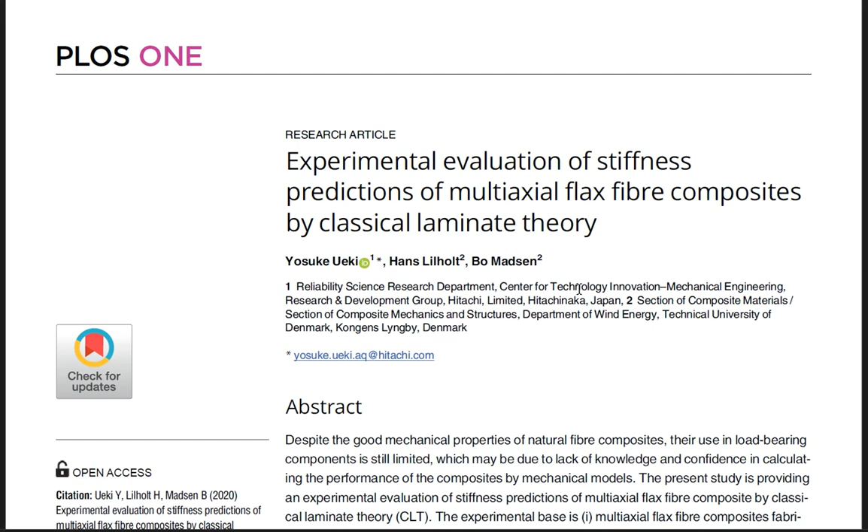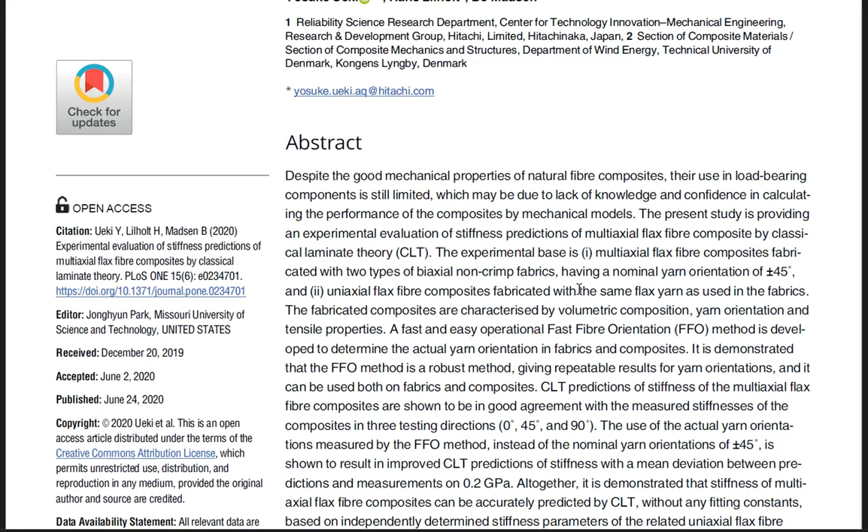In our course, we have established CLT as the fundamental methodology for predicting the macroscopic elastic behavior of a composite laminate, based on the properties and orientations of its individual plies. This paper serves as a direct and practical validation of this very theory. It moves the concept from the textbook to the laboratory, testing CLT's accuracy on a specific emerging class of materials: multiaxial natural fiber composites.

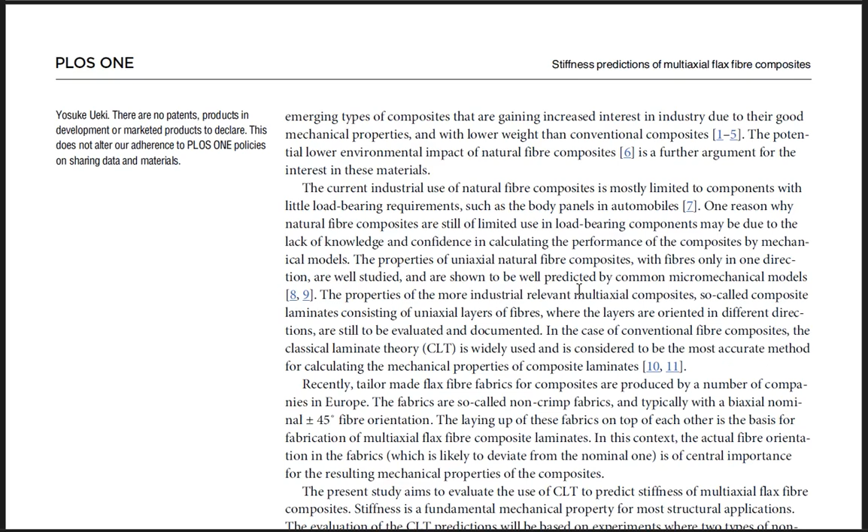The researchers fabricated multiaxial composites using two types of biaxial flax fabrics with a nominal orientation of plus minus 45 degrees, arranged in two different layups, A and B.

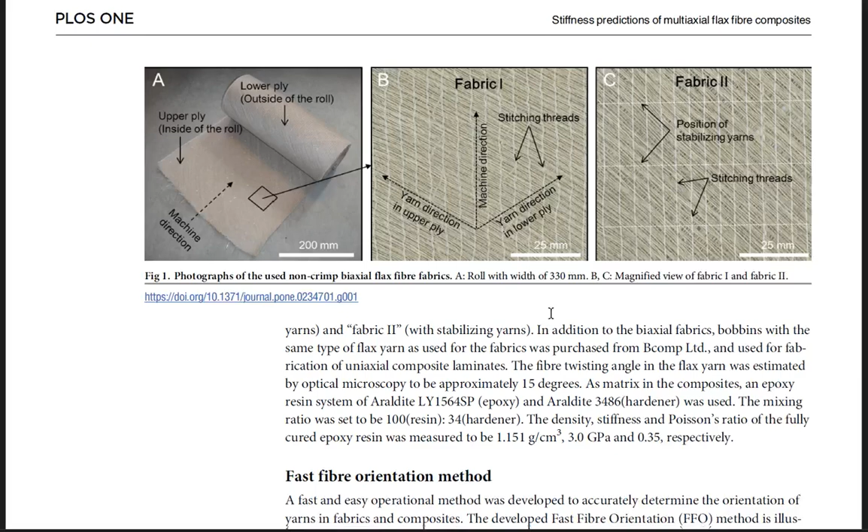Crucially, they identified that the actual fiber orientation in the fabric can deviate from its nominal value. To address this, they developed a novel method called fast fiber orientation, or FFO method. It used 2D fast Fourier transformation on scanned images to measure the actual yarn angles with high precision.

In this paper, the data shows the actual orientation was not perfectly plus minus 45 degrees, and the fabric was notably unbalanced.

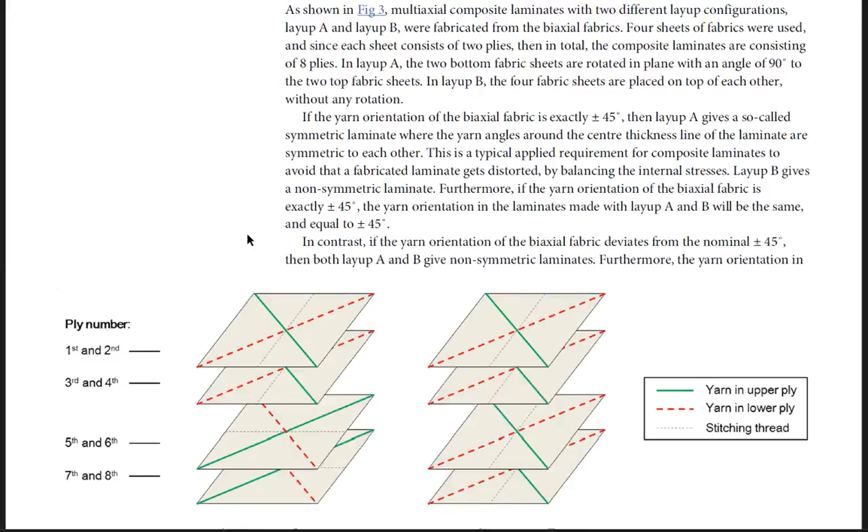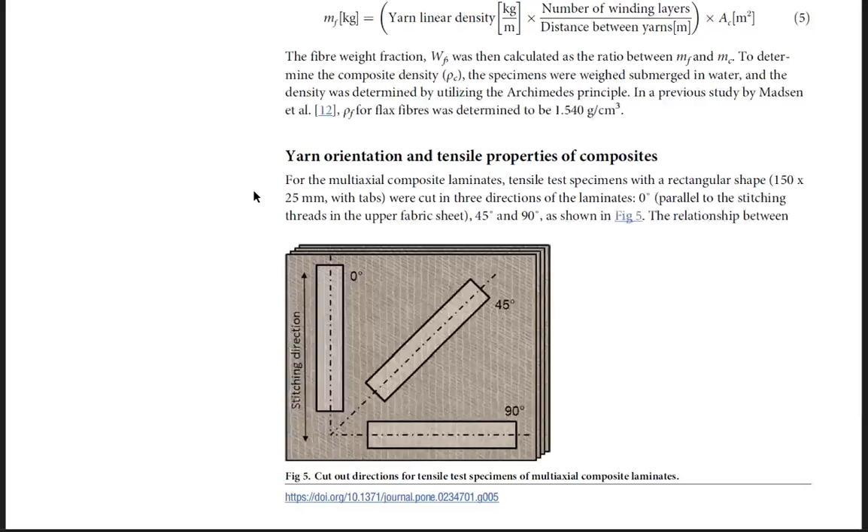So, from the table in this paper, we can see the experimental stiffness of this multiaxial composite was highly anisotropic, as expected. Table 4 is a little bit lower on this paper.

Let us find that. Here, it was presented for layup A and layup B.

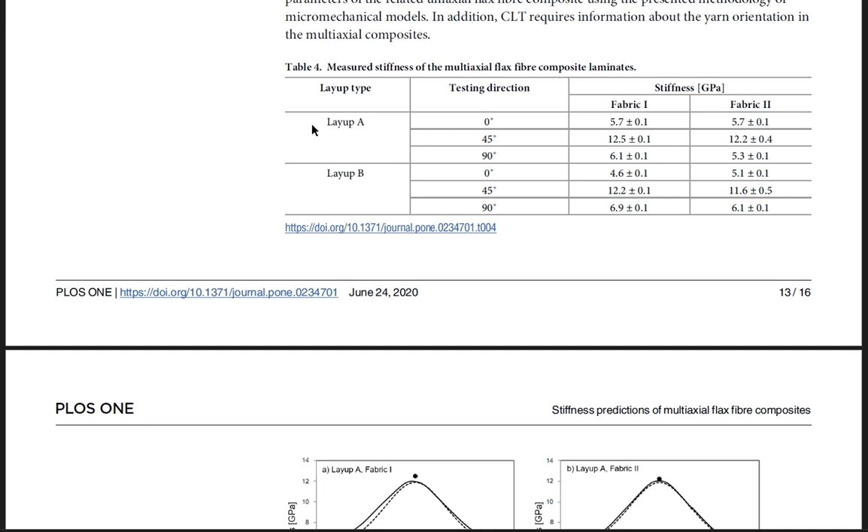For the CLT predictions, the input parameters for the unidirectional ply were not fitted, but were determined independently. The longitudinal stiffness E1 was derived from tests on uniaxial composites, corrected for fiber volume fraction. The transverse stiffness E2 and shear modulus G12 were calculated using micromechanical models like the inverse rule of mixtures and the Halpin-Tsai equations, which are also core topics in our course.

From figure 10, we can validate the critical finding, and this is the most significant finding. The CLT predictions, when using the actual FFO measured fiber orientations, showed excellent agreement with the experimental data here.

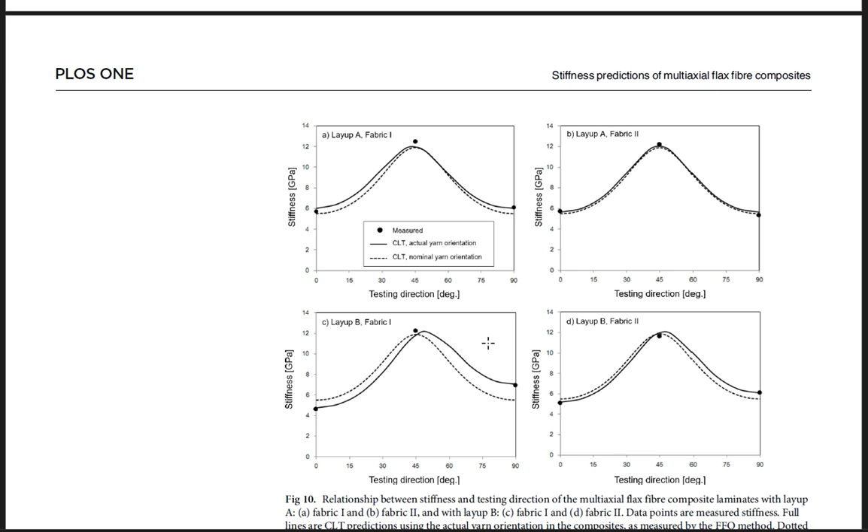But when the same CLT model used nominal plus minus 45 degree orientations, the error increased significantly to a mean of 0.5 gigapascal, whereas earlier it was just 0.2 gigapascal. These values were noted in that paper.

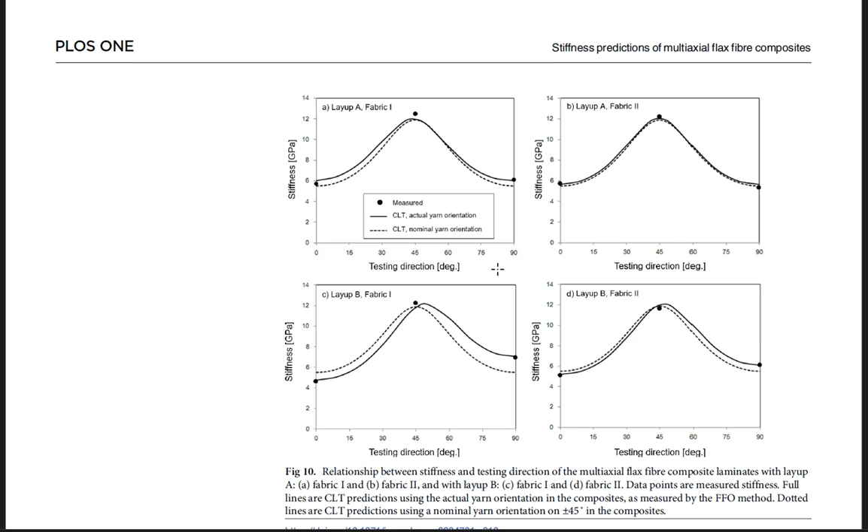Boldly stated: a sophisticated model is only as good as the real world data we feed into it.

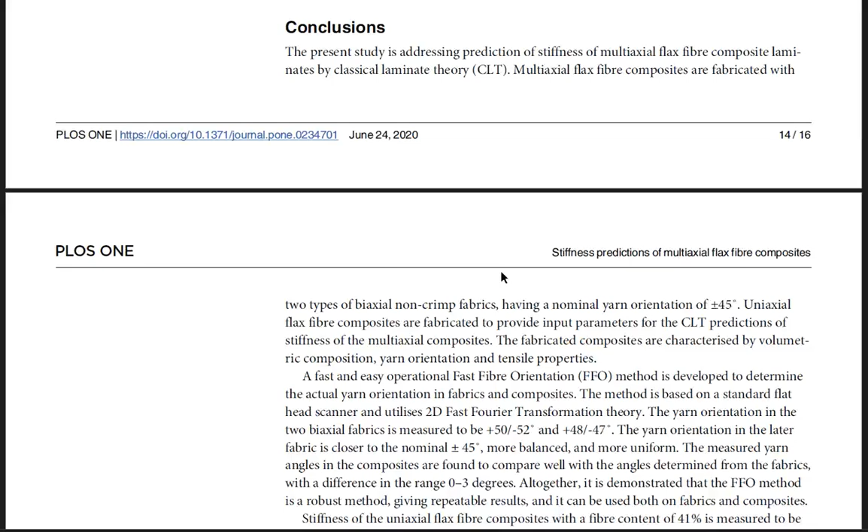So from this paper, we can have takeaways like this: the paper successfully validates classical laminate theory as a powerful and accurate tool to find multiaxial flax fiber composite stiffness, provided it follows two conditions. First, the uniaxial ply properties are properly characterized, and second, actual fiber orientations in the fabric are measured and used, not just nominal values.

This work directly connects to our course by demonstrating the practical application and limitations of CLT. It underscores that for reliable engineering of composite structures, meticulous material characterization is not an optional extra. It is a fundamental requirement.